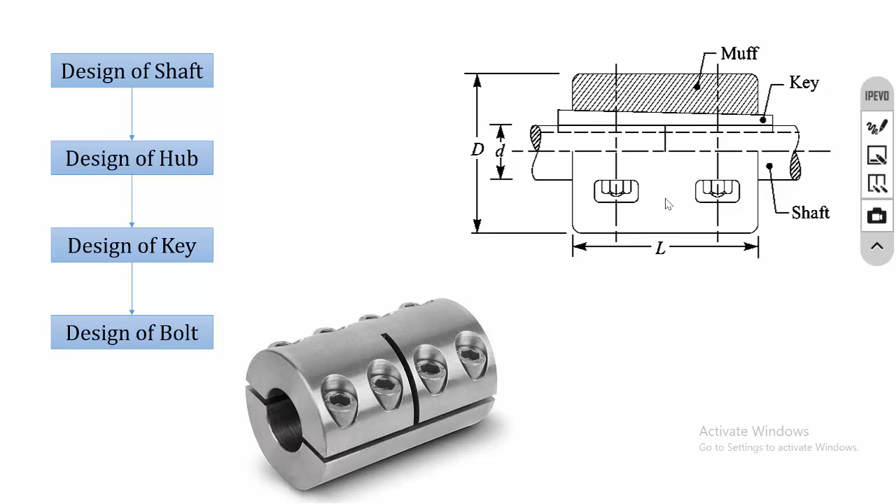If the material properties of the coupling are not given in the problem, we can assume the material as mild steel for keys, bolt and shaft. For mild steel, sigma 1 is 90 Newton per mm square, considering all the factor of safety values, and tau 1 is equal to 40 Newton per mm square. For the hub, the material is cast iron with tau 2 equal to 15 Newton per mm square.

The first four steps are common for both muff and split muff coupling. Only thing is we are going to add the design of the bolts. So the first step is calculation of shaft diameter.

First we have to calculate the torque by using the power and the speed. After calculating the torque, substitute it in the stress equation and calculate the diameter. Then, using the R20 series, standardize the size of the diameter.

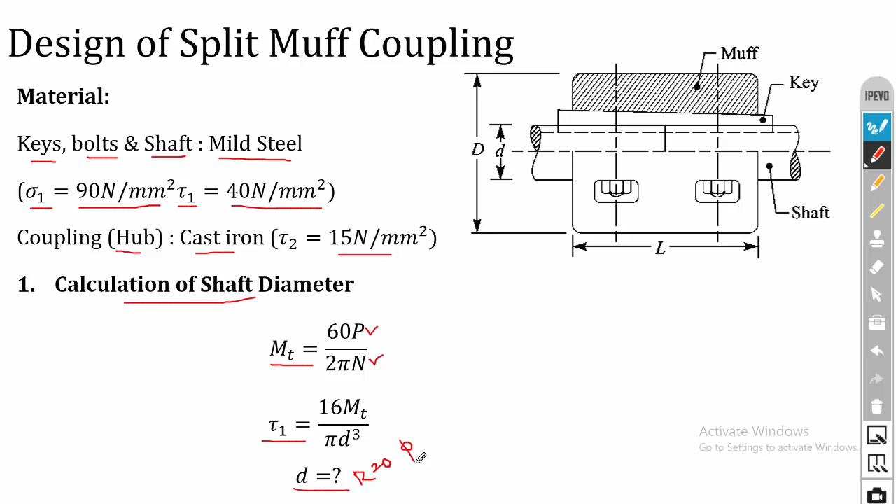The second step is dimensions of the coupling. The diameter of the hub is same like your muff coupling: capital D is 2.5 times the smaller d, and the length of the hub is 3.5 times the diameter.

Here we are going to use a single key, so the length of the key is same as the length of the hub. This is very important. In the case of muff coupling, we use two keys, so the length is half of the hub length. But here we are going to use a single key.

Then the width and thickness of the square sunk keys. Here we are going to use the square sunk key, so the width and thickness is equal to d divided by 4.

The third step is same, checking the strength of the coupling. Consider the hub as a hollow shaft: pi by 16 tau 2 into outer diameter power 4 minus inner diameter power 4, divided by outer diameter. So here we have to calculate the value of tau 2. If the calculated value of tau 2 is less than the allowable tau 2, then the design is safe.

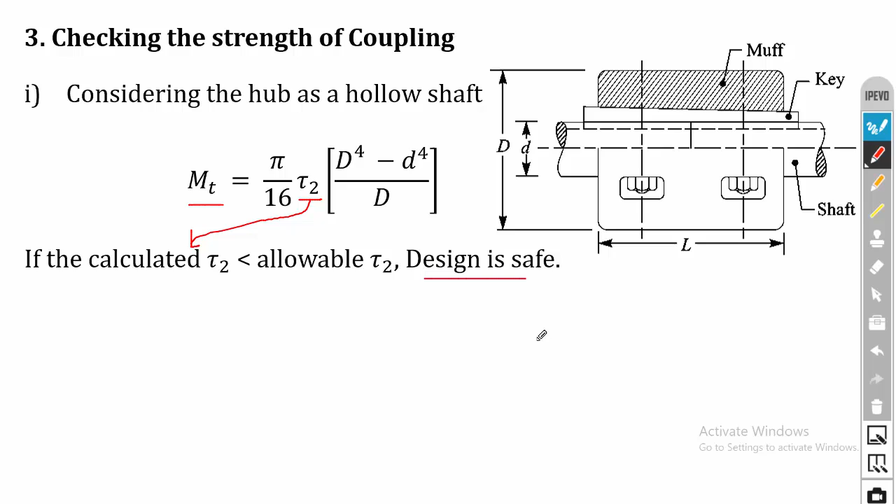The next one is checking the strength of the keys. We have already designed the keys, so by considering shear, calculate the tau 1 value and check whether it is less than the allowable stress value. Then considering crushing, calculate the sigma 1 value and check whether it is less than the allowable sigma 1 value.

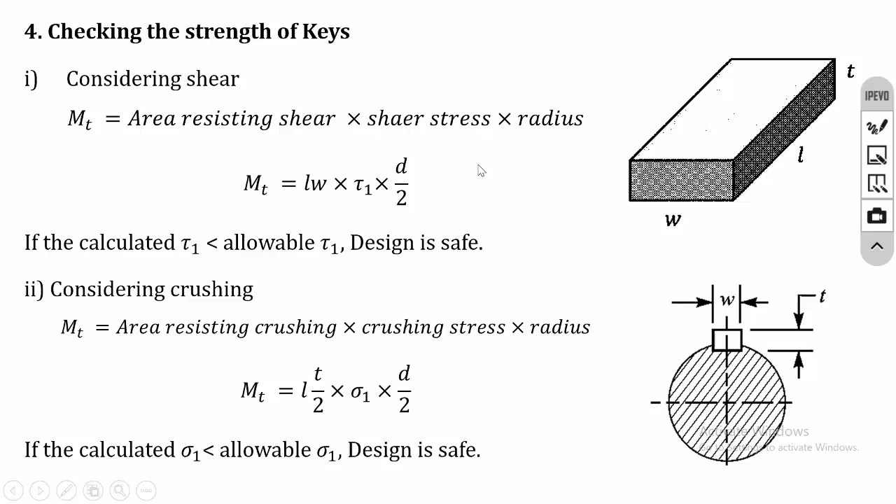The fifth step is new for split muff coupling. First we have to select the number of bolts. If the diameter of the shaft is less than 100 mm, the number of bolts is 4. For diameter between 100 to 180 mm, the number of bolts is 6. For diameters greater than 180 mm, we can take the number of bolts as 8.

Then for the design of bolt, we know that MT is equal to torque capacity of one bolt into the number of bolts, N. First we have to calculate the torque capacity of one bolt. Here the bolt is subjected to axial load, not torsion load.

So the equation is MT is equal to pi square divided by 16, dB the diameter of the bolt squared, into mu. Here mu is the coefficient of friction between the muff and the shaft surface. If the mu value is not given in the problem, we can assume a mu value of 0.3. Then sigma 1 is for bolt, d is the diameter of the shaft, and n is the number of bolts. So here we have to calculate the value of dB, that is the diameter of the bolt.

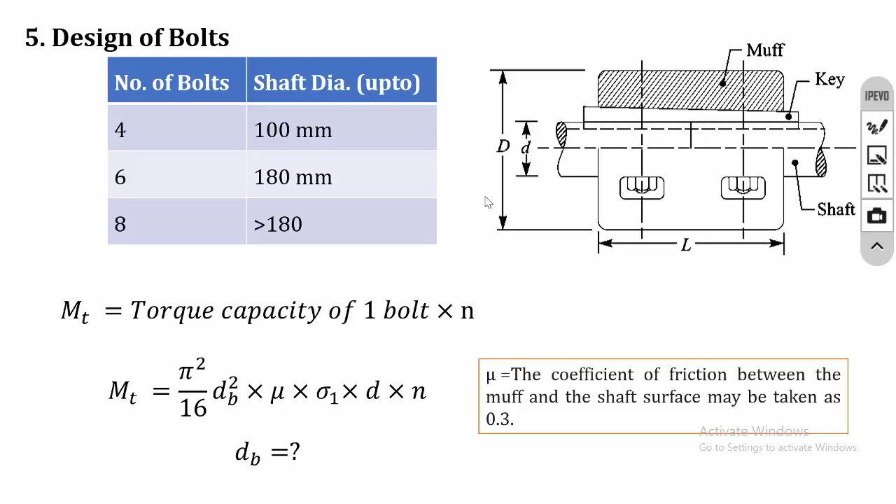After calculating everything, we can write all the dimensions along with the drawing, that is the last step, resulting dimensions. So we'll solve a problem on that.

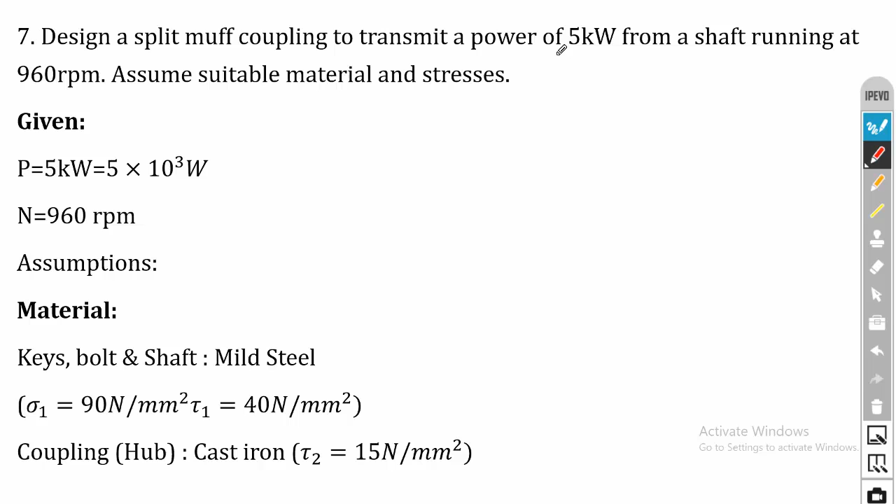Design a split muff coupling to transmit a power of 5 kilowatt from a shaft running at 960 rpm. Here the power is given as 5 kilowatt, that is 5 into 10 power 3 watt, and the speed is 960 rpm.

Assume suitable materials and stresses. We can assume the material as mild steel for keys, bolt and shaft, with sigma 1 as 90, tau 1 as 40. For the hub, the material is cast iron and tau 2 is equal to 15 Newton per mm square.

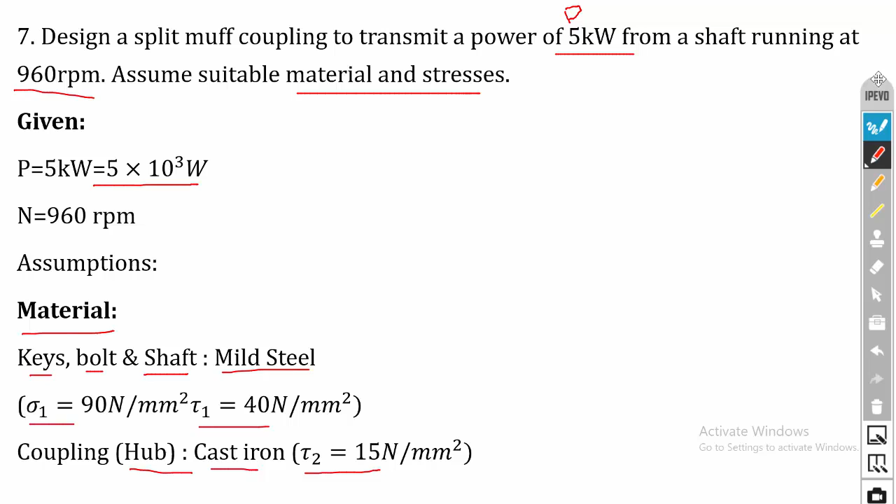The first step is calculation of shaft diameter. First calculate MT from the power and the speed. The MT value is 49.7 into 10 power 3 Newton mm. After calculating the MT value, substitute it in the tau 1 equation, that is 16 MT divided by pi d cube.

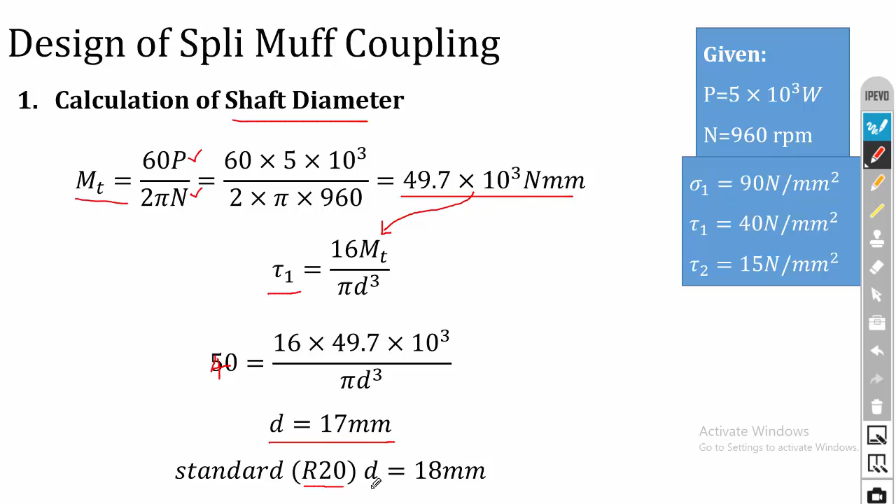In the problem, the tau 1 value is given as 40, not 50. Substitute that value and calculate the diameter. The calculated diameter value is equal to 17 mm. By using the R20 series, the standardized diameter is equal to 18 mm.

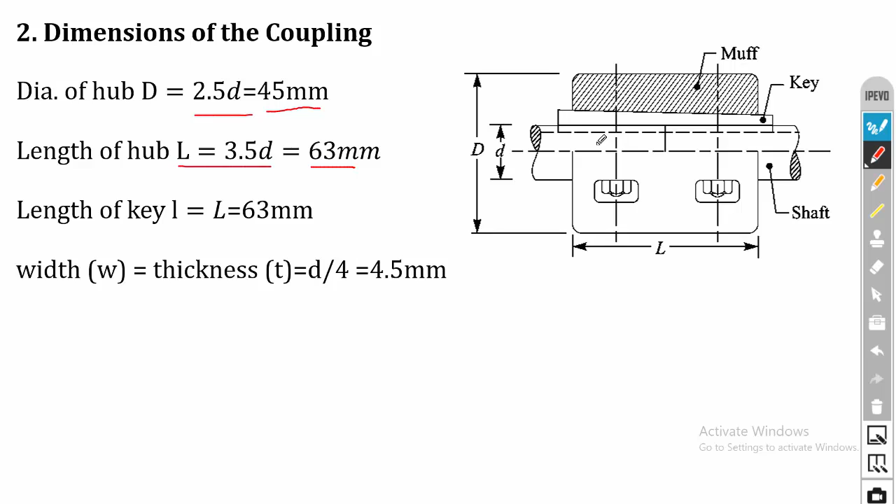The second step is dimensions of the coupling. The diameter of the hub is 2.5 times the shaft diameter, so it is 45 mm, and the length of the hub is 3.5 times the shaft diameter, that is 63 mm. Since we are using a single key, the length of the key is same as the length of the hub, that is equal to 63 mm. Then the width and thickness of the key can be calculated.

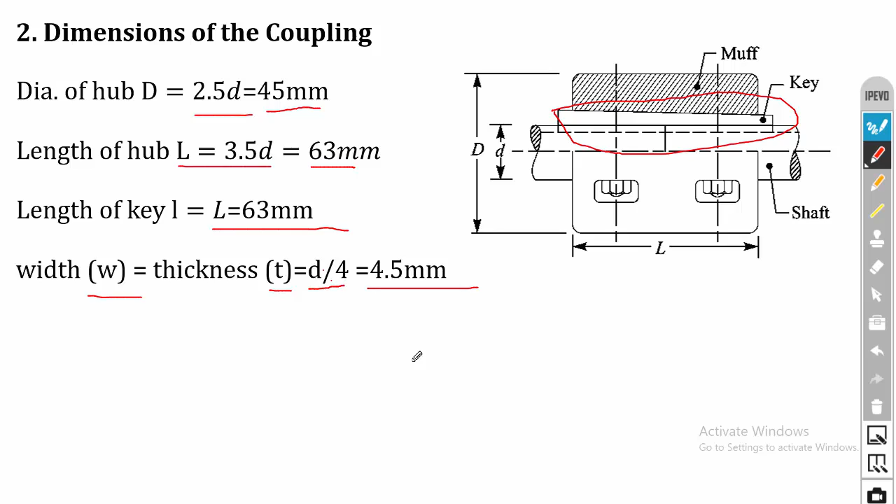Here we are going to use a square sunk key, so the size is d by 4, that is equal to 4.5 mm. After calculating all the dimensions, we can move into the checking section.

The first check is the strength of the coupling. Consider the hub as a hollow shaft, substitute all the values and calculate tau 2. If the tau 2 value is less than the allowable tau 2 value, then the design is safe. Here the calculated tau 2 value is 2.9 Newton per mm square, so the design is safe.

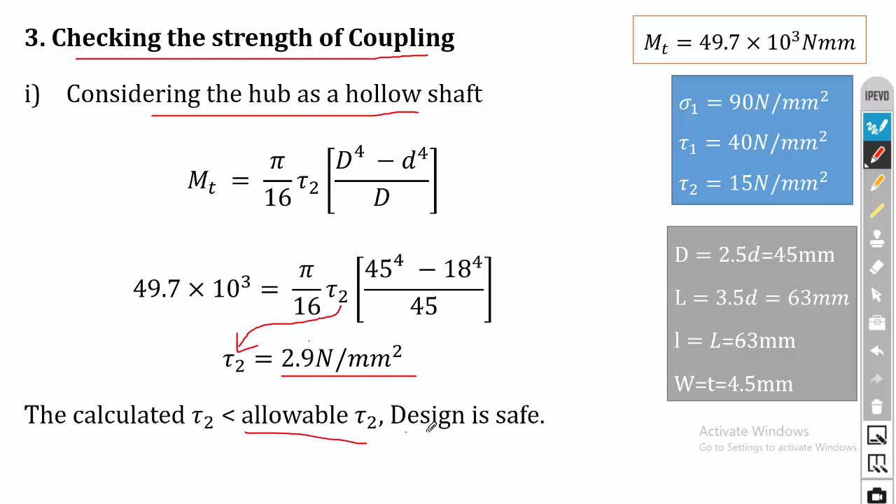Then we move into the design of keys. First consider shear: substitute MT, length, width and calculate tau 1. The tau 1 calculated value is 19.5 Newton per mm square, which is less than the allowable tau 1 value, so the design is safe.

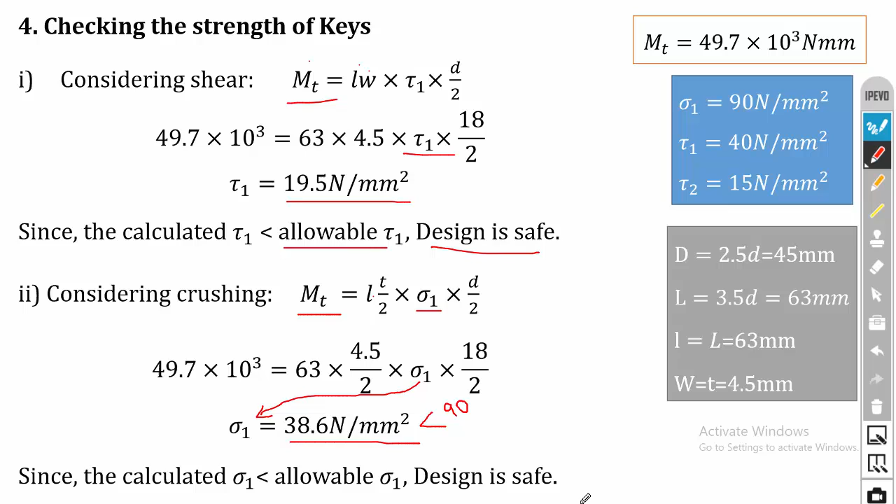Then by considering crushing, MT is equal to L into T by 2, sigma 1 into D divided by 2; calculate the value of sigma 1. We have already solved many problems on the design of keys, so I am not going in depth here. Calculate sigma 1, that is 38.6 Newton per mm square, and it is less than the allowable sigma 1 value, that is 90 Newton per mm square. So the design is safe.

The fifth step is design of bolt. Here the diameter of the shaft is small, so I have considered the number of bolts as 4. Substitute all the data.

MT is torque, dB we have to calculate. Mu is not given in the problem, so I am going to assume a value of 0.3. Sigma 1 is 90, diameter of the shaft is 18, and the number of bolts is 4. So the calculated diameter of the bolt is 6.44 mm.

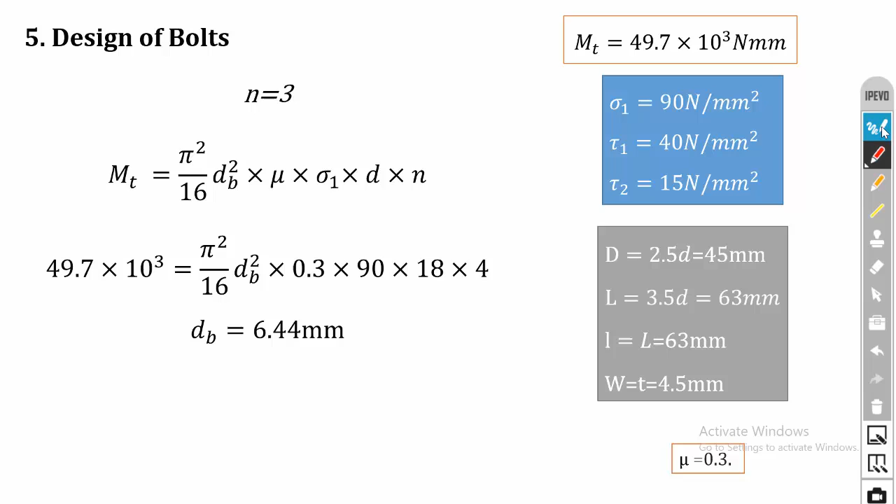The last step is to draw the split muff coupling drawing and write all the data as calculated. That's all, this is how we design the split muff coupling.

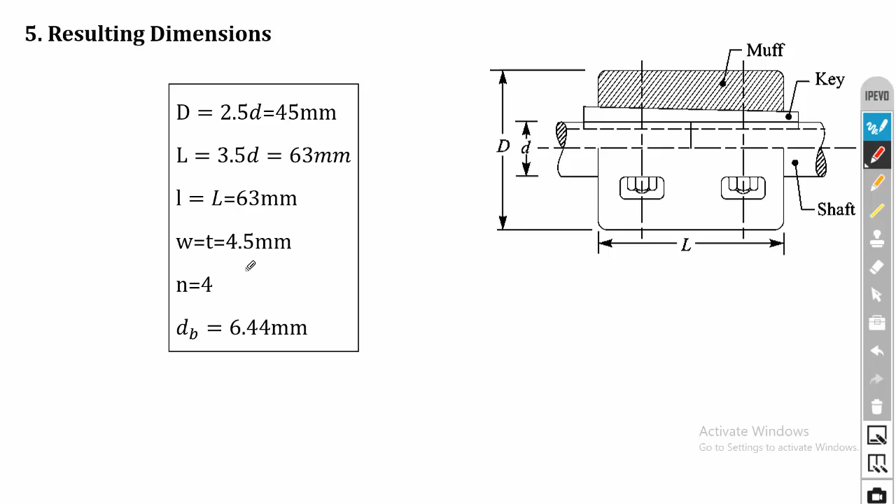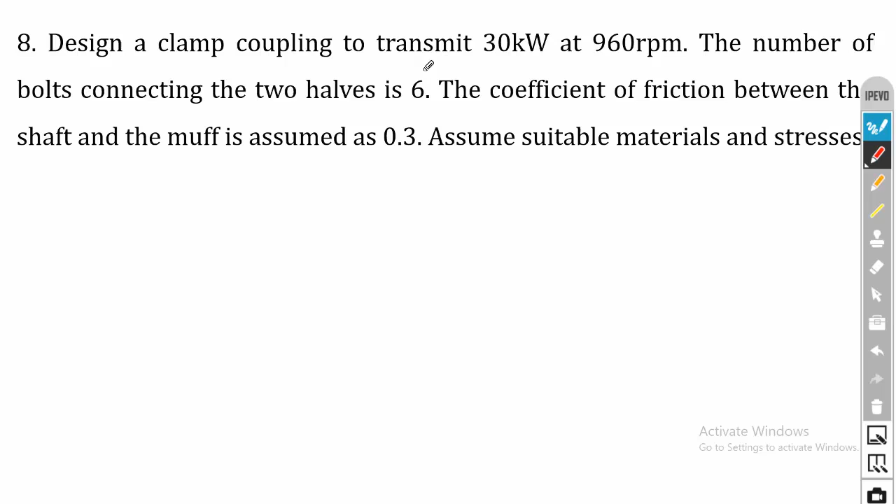Now the tutorial problem: design a clamp coupling, same as the split muff coupling, to transmit 30 kilowatt at 960 rpm. The number of bolts connecting the two halves is 6, so n is given as 6. The coefficient of friction between the shaft and the muff is assumed as mu equal to 0.3. Assume suitable materials and stresses.

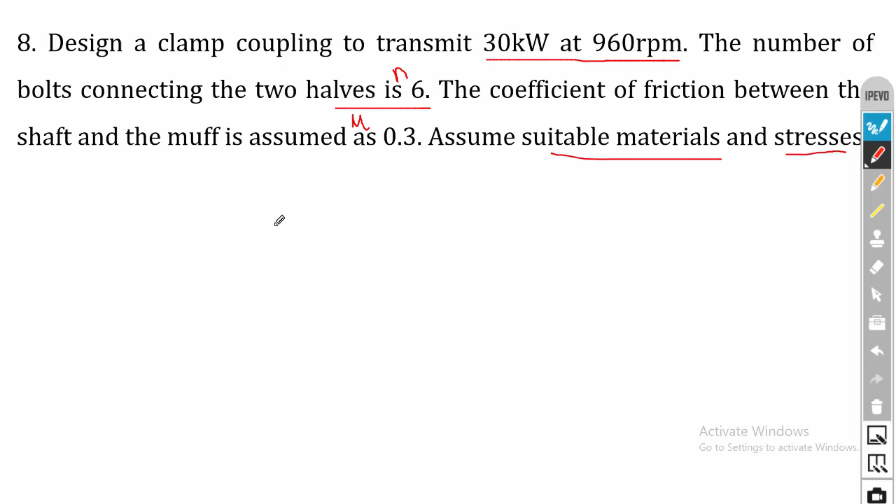You can use the same procedure to find the remaining dimensions. Finally, you can draw the drawing and write all the dimensions.